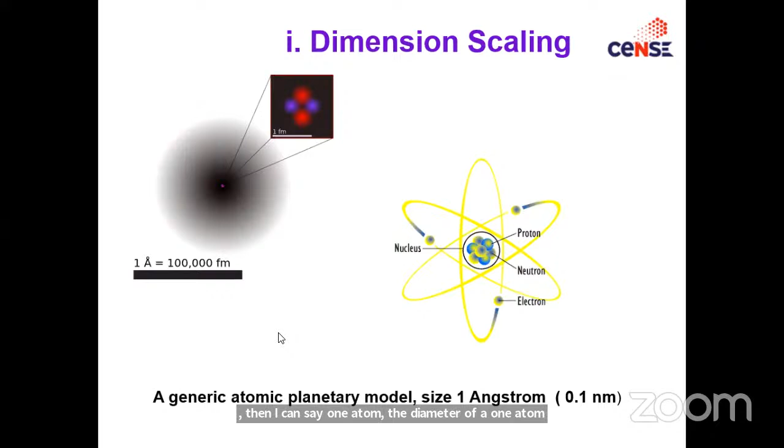Now, if you look at this one, graphene nanoribbon thickness is about 1 nanometer. The same sheet, if it is made into a tube, is called carbon nanotube. This is about 10 nanometer. This is multi-wall, about 100 nanometers.

Why I'm talking about nano: the word started with materials when graphene and carbon nanotubes formed, motivating scientists. Is it possible to make all these materials, particularly semiconductor materials, of this scale? Because if the material's dimension is reduced, their properties drastically change: physical, chemical, optical, mechanical, electronic properties all change. This leads to more invention to explore these for various applications.

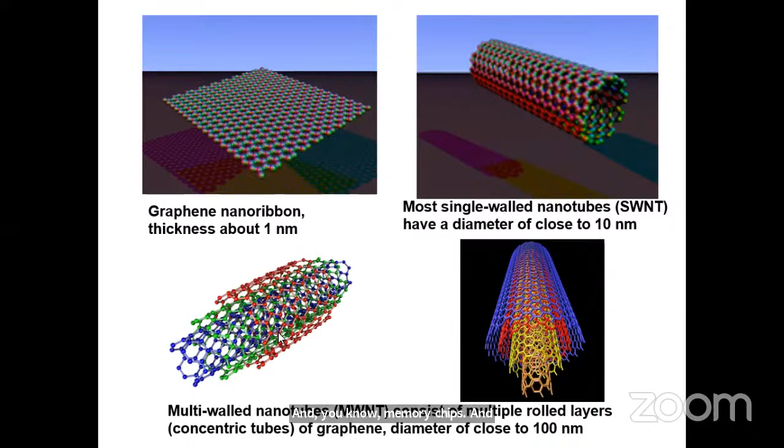The semiconductor technology in the 1980s started miniaturization and integration of many functionalization methodologies. In computers, you see memory chips, processors and various types of sensors, all came up because of this miniaturization. So that motivated us to look below that.

If you look at day-to-day life, we can see zinc oxide nanorods, another nanoscale material that started around 2000 and above. That's a different method I will show you later. This is about 1 micron. Then human red blood cells are of the size 8 to 10 microns.

Same thing, microelectromechanical systems - a device fabricated on silicon called tweezers. It's a mechanical tweezers used to hold individual biological cells. It is very difficult to handle them since cells normally fold, so if you want to hold the cells in a normal planar condition, you can use these tweezers. This is called a microelectromechanical system.

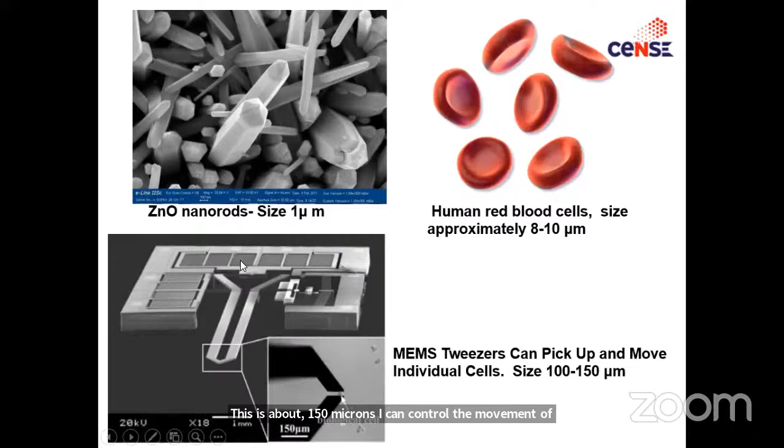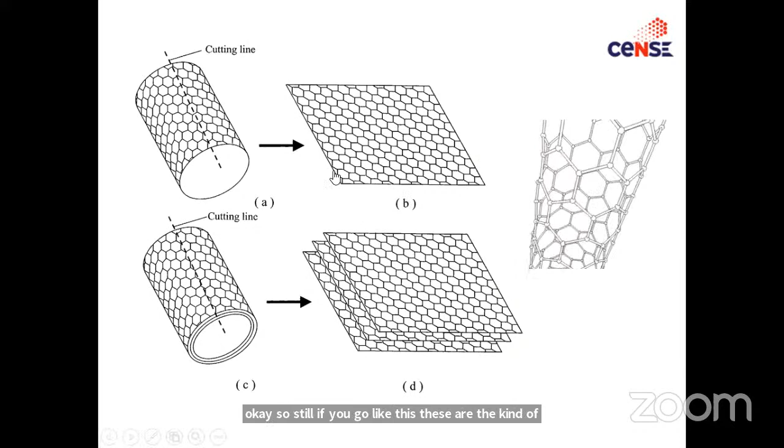This is about 150 microns. I can control the movement of this tweezer tip by applying voltage on the backside. So this is micron scale technology. Still, if you go like this, these are repeated shapes of this single wall carbon nanotube sheet, all 1 nanometer, 10 nanometer, 100 nanometers.

This is what I'm trying to stress here. So this is the first production of nanotechnology based product, that is carbon nanotubes. If you look at the right side, as I mentioned, if the material's dimension is reduced drastically, the physical, chemical, and various properties will change. So one glimpse of this is carbon nanotube.

Various techniques have been developed to produce nanotubes in sizable quantities, including arc discharge, laser ablation, high pressure. This has been a research challenge all these years. Now many of these techniques have matured so that you can make this nanostructure on a big scale. That was a bottleneck for some years, but in some applications these are now well established.

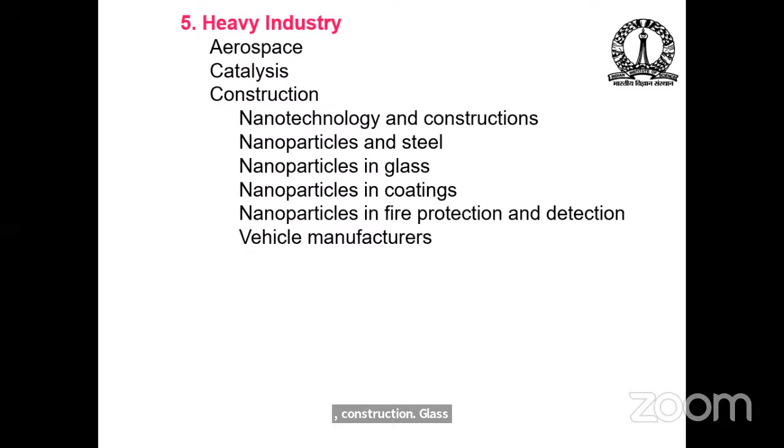So then heavy industry like aerospace, construction, glass coating - varieties of applications you can see. Vehicle manufacturers - I think you all know these days, all the cars and vehicles are equipped with MEMS, micro electromechanical based sensors. All cars are having this kind of sensors.

Now, next generation, you will have nanotechnology based sensors. These MEMS technologies were invented around 20 years back. Now they are all well established, and we are using all those things. So it may take some more time, like consumer goods - nano foods, household, optics, textile, cosmetics, agriculture, and sports. These are the possibilities, and many have already been deployed in applications.

And still, one thing we have to remember - the risk of using nanoparticles in construction, and also the risk of disposing the nanoparticles, nanomaterials - still a big challenge, because we have been experiencing computer user wastage issues. These are still a problem to dispose, where to throw it off. All countries are facing the same problem of disposing now in the laptop era, and all bulky computers, TVs - you don't know where to dump them. So this risk is always there.

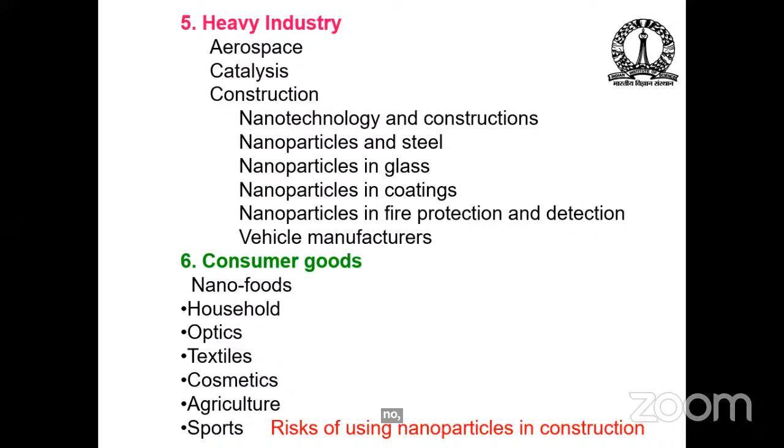Even for nanotechnology, it may be causing still hazardous health and environmental disasters. So that is a big question you have to keep in mind before doing any advanced technology.

At a time, there will be 25,000-30,000 athletes running, so it is very difficult to keep track of who started first when they are completing this around 42 kilometer run. Now, each participant is given a sensor that they have to tie to their shoelace.

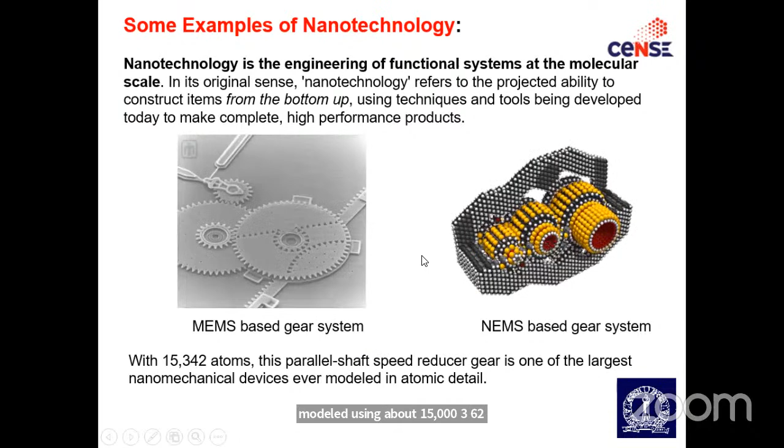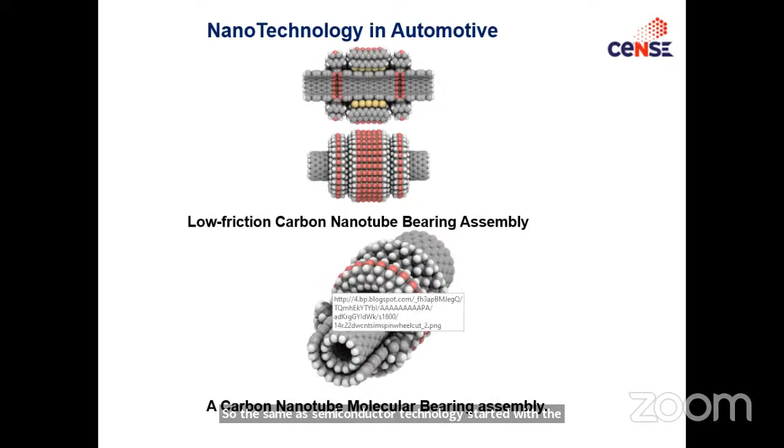Now the challenge here is how to make this nanostructure. That is very important, because see how silicon technology in 1970s, they started semiconductor fabs where you can make thousands of transistors simultaneously in one shot. So that's all called wafer fabrication process. Like that, how to make these nanostructures.

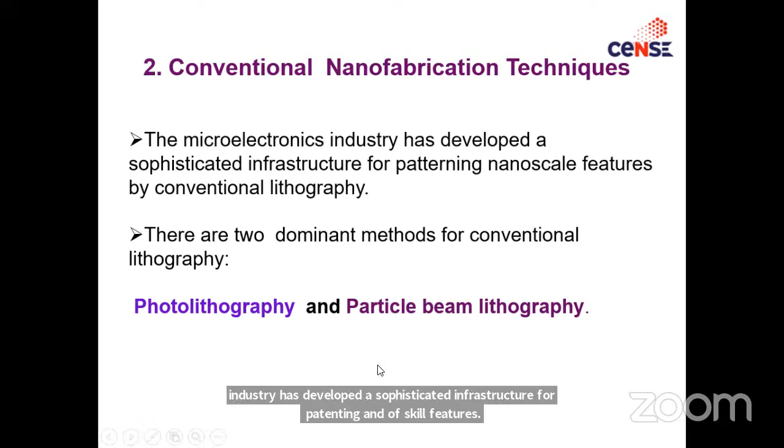The microelectronics industry has developed a sophisticated infrastructure for patterning nanoscale features by conventional lithography. There are two dominant methods, photolithography - photolithography is nothing but pattern transfer. If you look at this, I've collected from somewhere: litho is Greek meaning stone, graphia means writing - that means you will be writing some information on a stone. So in semiconductor lithography, silicon is your stone, and patterns are written with a light-sensitive polymer, that is the writing. So this is how it is done.

So lithographic patterns are repeated up to 40 times - this is the way the technology is developed. I'm not going into full details, this is a separate talk altogether if you go just into lithography. Historically, advances in lithography have gated advances in IC cost and performance. This is very important.

The advance, historically, lithography has the very great advantage. That's how ICs are made. The cost, unless it is done using this technique, making an individual transistor assembly is very expensive, and it needs a very high-end clean room. These are all expensive, that's why industries in India find it very difficult to maintain such fabs, fabrication labs, as well as the higher-end equipment. Okay, so whatever it is, this is how it is done.

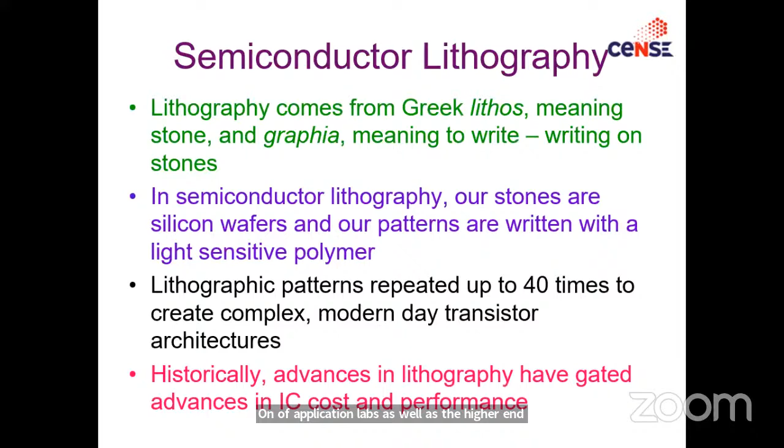I don't know how many of you remember the cyclostyle machines. Lithography is like when we were at school level, any notice or multiple copies had to be made using stencil cuts. They take a paper, the letters are cut, the alphabets are cut on the paper, then the paper is put onto a printer, then the printer puts the ink on it, making multiple copies. So lithography is also the same, it's almost like printing artwork on paper or another suitable material.

Nanolithography is the next level, the branch of nanotechnology concerned with the study and application of fabricating nanometer scale structures and patterns, with at least one lateral dimension. Dimension reduction can be in all three axes: x-axis, y-axis, z-axis, but I'm talking about the lateral, so only two axes, not all three.

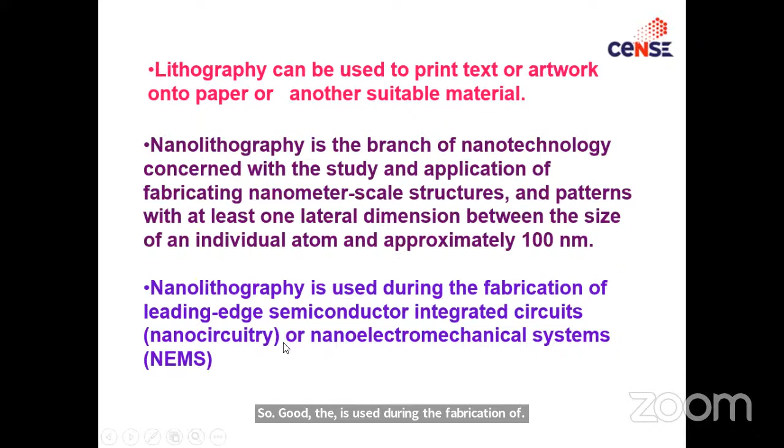Nanolithography is used during the fabrication of leading semiconductor integrated circuits, nanocircuitry, or nano electromechanical systems. There are varieties of lithography techniques, contact, imprinting, and different industries use different techniques, but I am not going into the details here. Let us start with this point.

Here you see this is a silicon substrate, a wafer, and you put a photoresist on it, and here is a mask. Whatever pattern you want to make, you make on the mask. In this mask, the black region is opaque, meaning light cannot pass through, and this is the pattern where light can pass through.

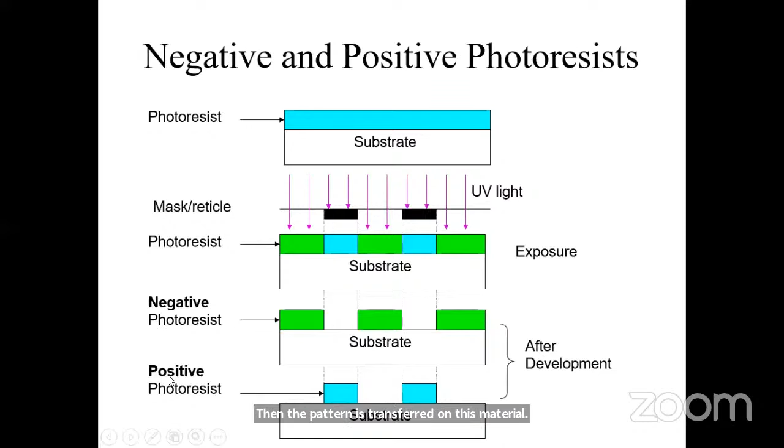This is a light-sensitive material, and you put a UV light, then the pattern is transferred onto this material. Then this photoresist can be removed using chemicals. There are positive and negative photoresists, and you can make patterns using photo masks, like the bright field and dark field mask, and transfer the pattern this way. So this is how it's done.

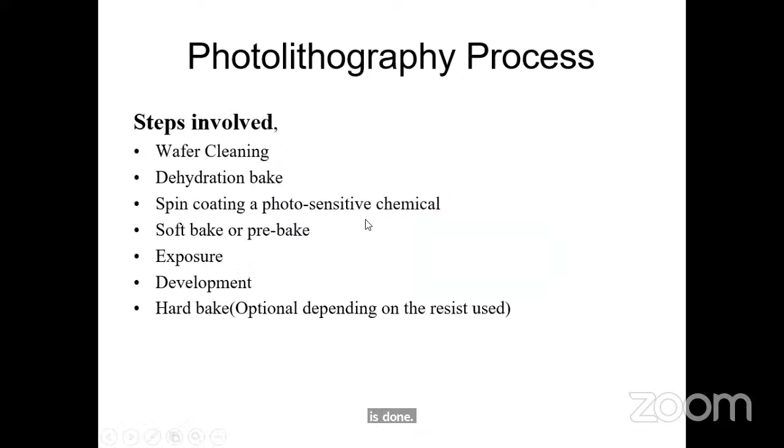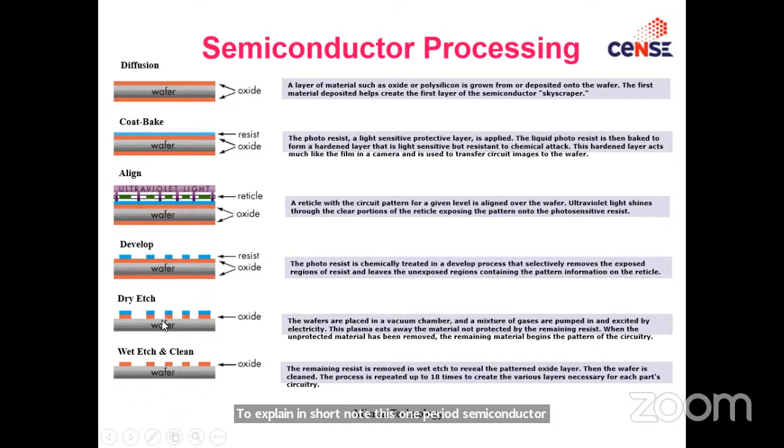Then there are various processes to develop all these things, it may be too difficult to explain in a short note in this one period. Semiconductor processing involves the wafer, baking it, aligning the mask, developing, etching, cleaning, all these things.

Now if you look at this, this is how an individual transistor is made. I think at least in masters you've seen P-type semiconductors, N-type semiconductors, transistors. This is NMOS, and this is PMOS. So this is how the microstructure is made, not full nanostructure.

Nano is up to 100 nanometers. People are doing this even at 500 nanometers, that is 0.5 microns, since 1 micron is 1000 nanometers. So this is how the pattern can be transferred, and ultimately this becomes the IC chip, which you can see at the bottom.

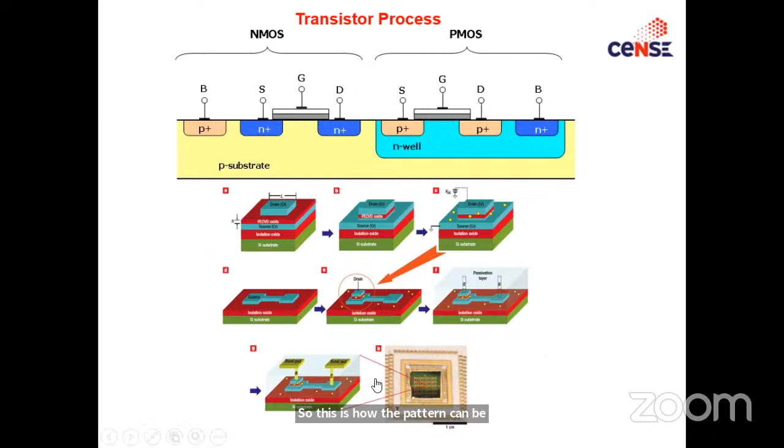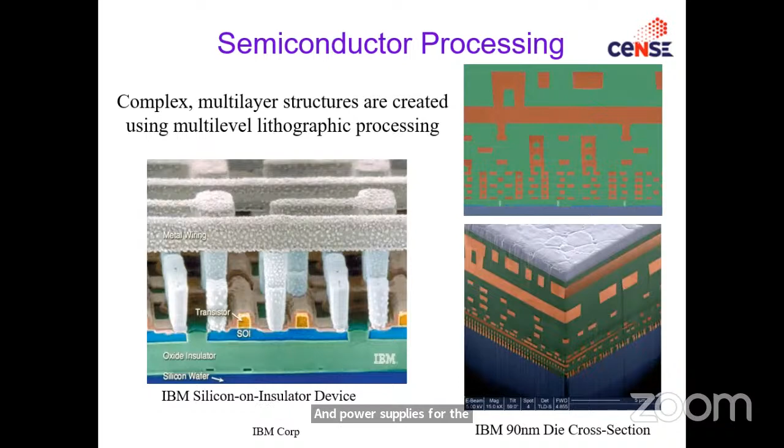If you look at this, this is an IBM structure, or semiconductor processing, where complex multi-layer structures are created using multi-level lithographic processing. You can see the cross-sectional view of the whole microelectronic process done on silicon. In silicon, a semiconductor, a metal for contact, a resistor, and a capacitor are all made. Putting all these together, you can make varieties of electronic devices like amplifiers, power supplies, power transistors, all built on this. So this is how ultimately it is done.

Why I'm talking about all these things is, in India we don't have this, though I don't like to tell you openly. Though I did a PhD in semiconductor physics in the 1990s, I never saw actual silicon. That's the state of our country at that time. I had never seen silicon, but I saw it for the first time when I went to Singapore in 1993. At that time, industries were only making 6-inch wafer based ICs. So as you can see individually, I have some.

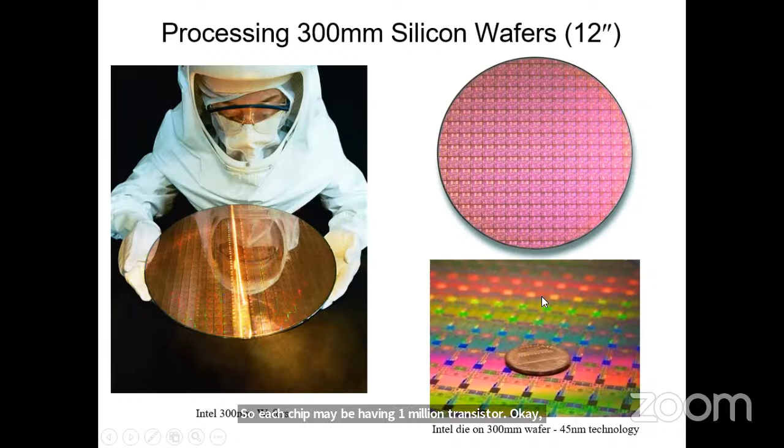See, this square is one chip. Later they cut it, it's called dicing. So this is the individual chip. Then they package it, and that becomes an IC. So this is how microtechnology works.

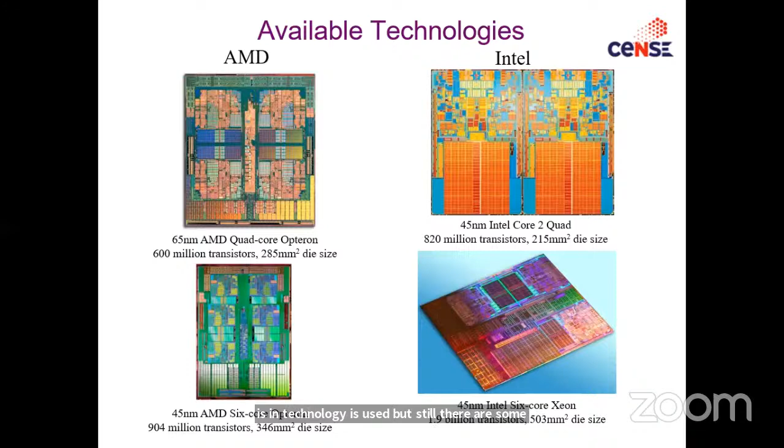In terms of scaling in nanoscale, the same technology is used, but still there are some limitations below 500 nanometers or 100 nanometers. Then another technique, another technology, is developed.

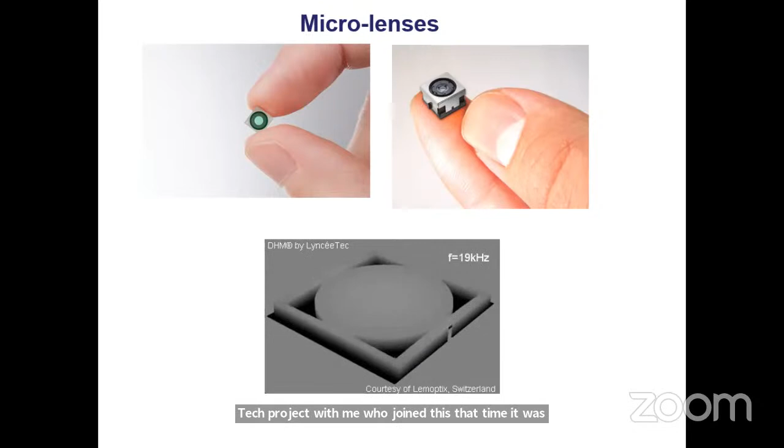Similarly, how many of you have seen your mobile cameras? This is a micro lens. All your mobile phones have cameras, and if you look at the backside, there's a small hole with a micro lens sitting there, where this micro lens is made. This is a well-matured technology. I think I have some lenses, because my master's student who did his MTech project with me joined when this just started, around 2002, when mobile phones started getting cameras, almost 20 years back.

Now our old film cameras have completely disappeared. We all live with these mobile phone cameras. We cannot spend even half an hour, one hour without a mobile camera and a photo. Every hour we take at least one photo.

So these are the micro lenses, and when I talk about the lens, the focal length is always changing. This is a variable focal length lens. You can see the focal length continuously changing, and this is a well established technology today. The dimension of these cameras is even less than a millimeter. Can you imagine? Less than a millimeter.

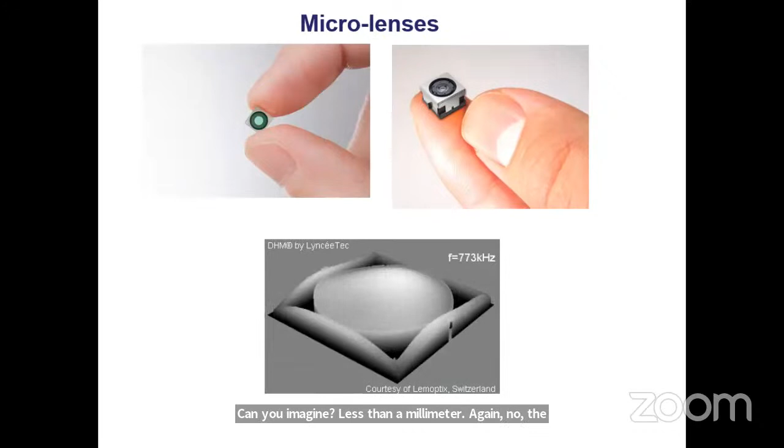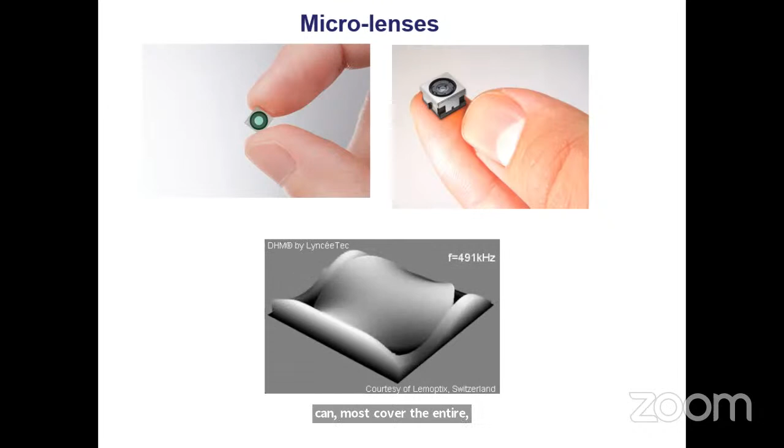The higher end mobile phones have cameras even 0.5 or 0.1 millimeter in diameter, maybe with a wide angle. You can almost cover the entire 270 degrees of angle. That is the level of micro nanotechnology.

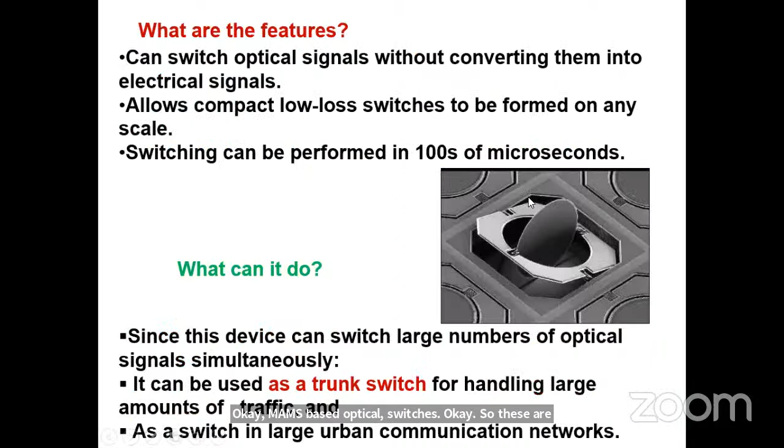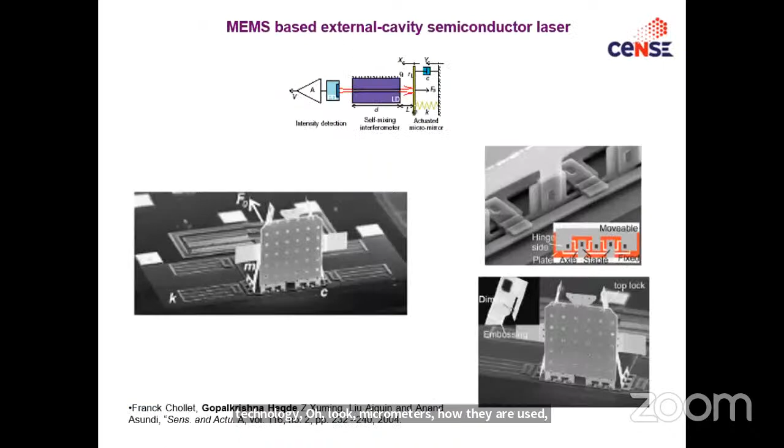So this is how all of this can be done through micro nanotechnology. These are all fabricated. MEMS based optical switches, using micro mirrors. This is semiconductor based technology, micro nano mirrors, how they are used as sensors, varieties of structures and methods.

Now, the limitation with this microtechnology is the lithography. Lithography is done using UV light. When the light passes through a small hole, there will be diffraction. So if I want to make 1 micron or 500 nanometer or 100 nanometer features, I cannot use UV-based lithography technique. I have to go for some other technology, that is deep UV, looking at the electromagnetic spectrum.

You cannot go with optical lithography. You have to go with electron beam lithography. That is the one used to make nanostructures, nano devices, through lithography.

So there is a limitation up to maybe 500 nanometers. You cannot go with the conventional lithography. You have to go for another technique called electron beam lithography to make the nanostructures.

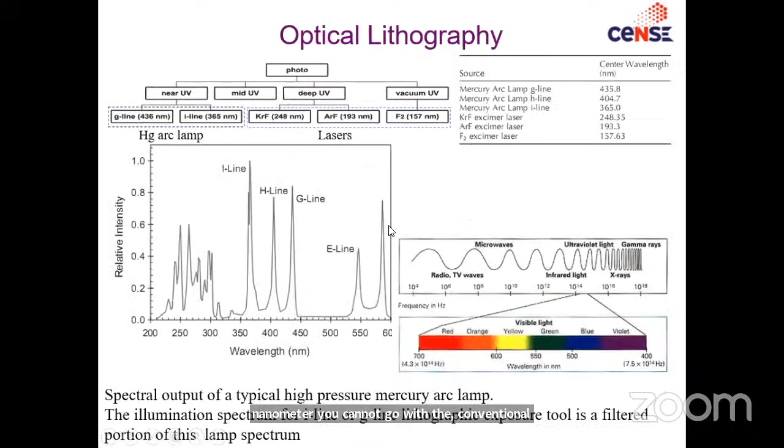Okay, let us skip all this. Now why I'm telling you, some Kannada is also there for those who can enjoy it. I used to give these talks in Kannada as well.

So I just mentioned when light passes through, it gets diffracted. If I do lithography using this, going down to 500 nanometers, my light gets diffracted because of the basic physics, so I cannot get the targeted pattern. This maybe works at 1 micron, but at 500 nanometers, if it gets diffracted like this, the pattern cannot be transferred with the same dimension.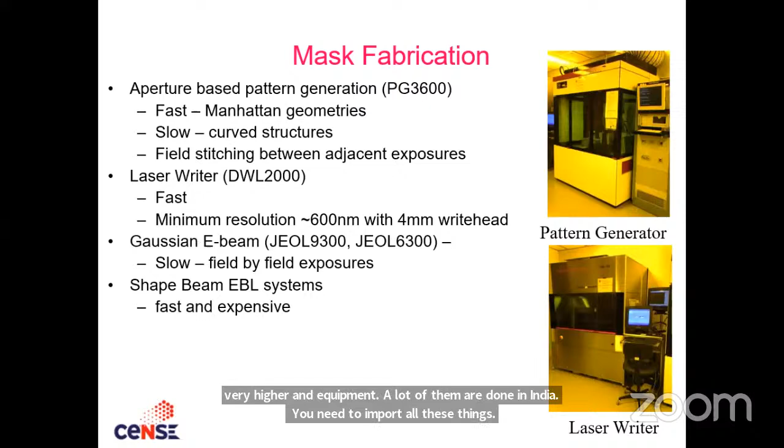So nothing to worry about. These are all the mask fabrication and other technologies. I'm just talking mainly about the technologies. They're very high-end equipment, and none of them are made in India. You need to import all these things. That's why we are not able to make much progress in semiconductor-based or nanotechnology, which is based on the conventional microtechnology industries. That's where the limitation lies.

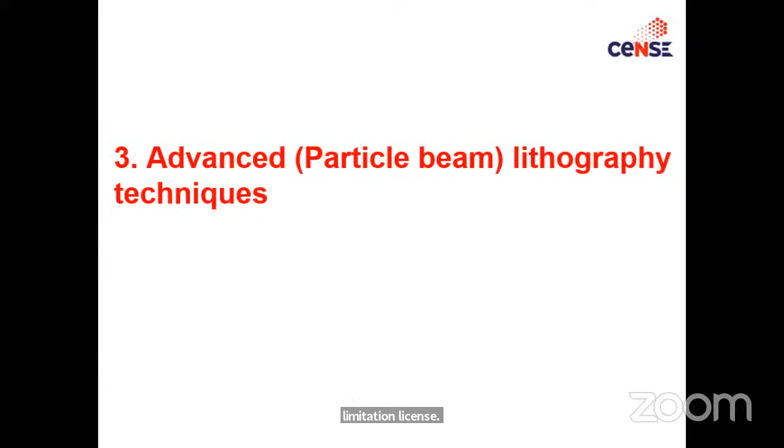Now this is X-ray lithography, but people are not using it anymore due to its limitations. Another approach is particle beam lithography, meaning instead of light, you use particles, that is, electrons.

Now cathode ray tube based TVs are no more. The electrons in cathode ray tubes used to move the electron beam inside the tube to produce the image on the screen. That was the earlier TV technology. Now this is no more; we are working on LED-based light emitting diodes, another interesting photonics technology. Now OLED-based screens are there, flat TVs have come.

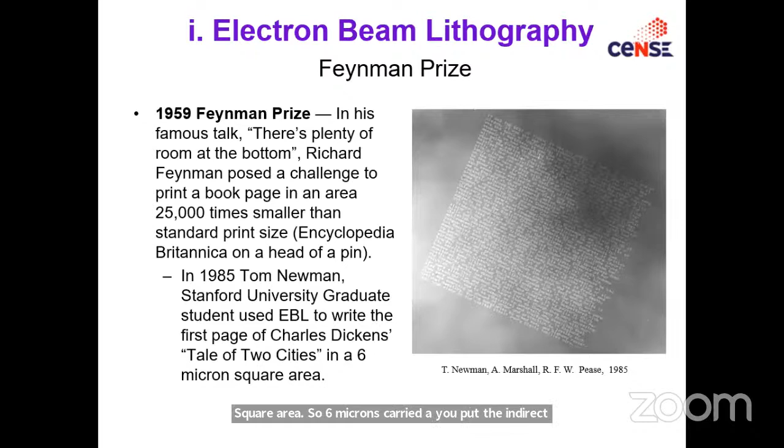Before that, this is where Feynman, one of the top theoretical physicists, mentioned in 1959 that there's still a chance. He put a challenge to print a book page in an area 25,000 times smaller than the standard print size. So one of his students wrote Charles Dickens' Tale of Two Cities in a 6 micron square area. That means there's a lot of chance, plenty of room at the bottom. That's his indication that you can go below the micron structure.

So that's where the next stage of nanotechnology started: electron beam lithography. Here, instead of using light, people started using electron beams because of the small dimension of the electron—I talked about 0.1 angstrom, 0.01 nanometer, similar to atom size. In electron beam lithography, you generate the electron beam and start writing structures. Unlike optical lithography, E-beam lithography allows high speed with small complex patterns. Point by point exposure limits the throughput; parallel exposure allows entire field exposure at once.

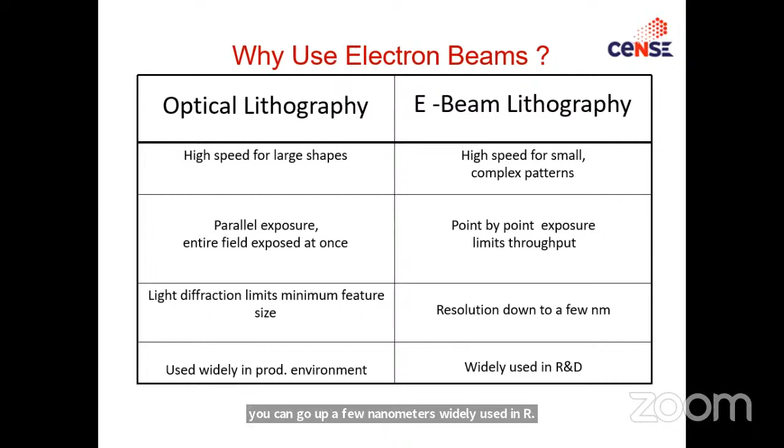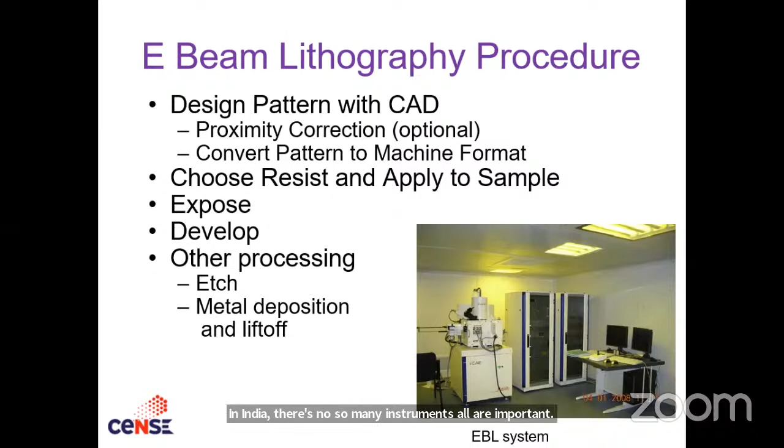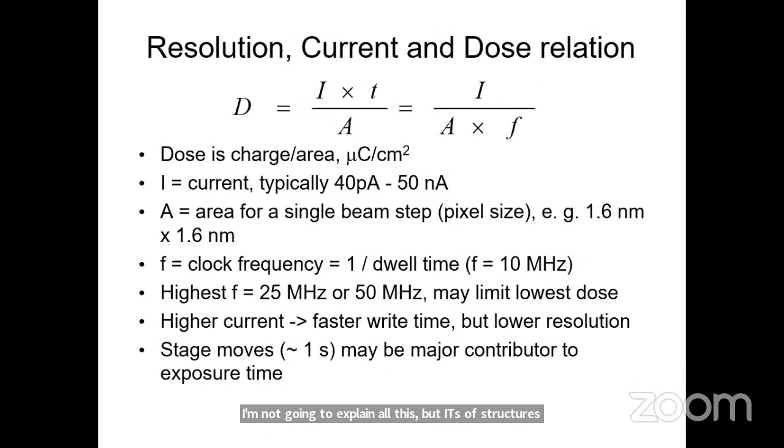Anyhow, this is a very complicated methodology; I'm not going to explain all this. Varieties of structures can be written using this one. This is how it works. There are many limitations and many control systems you have to use, and these are the mathematical limitations.

Imagine a semiconductor optical lithography process that you can do in maybe 1 or 2 hours. The same thing for an individual device will take 8 to 10 hours using this electron beam lithography. So it is not good.

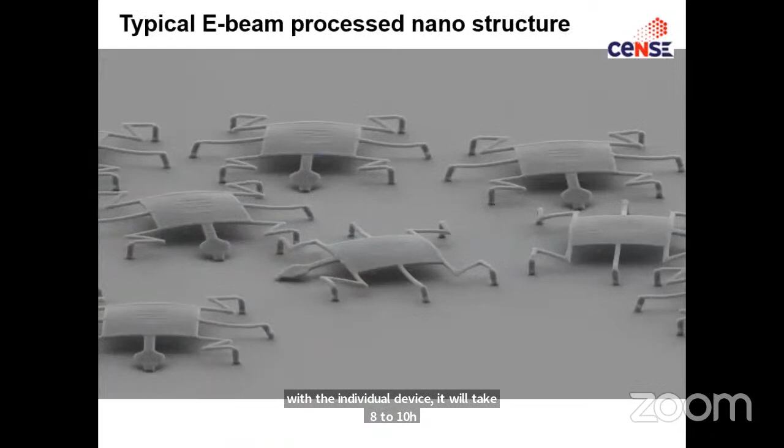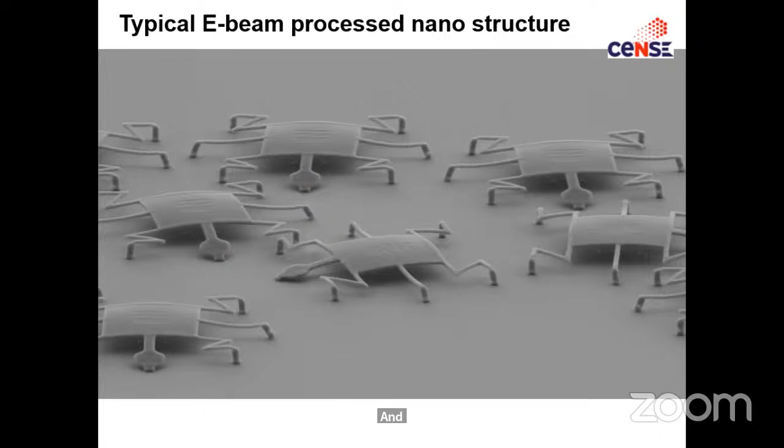However, structures like this—one of my friends from the US, very good in beam lithography, made this critical, interesting structure on silicon. I don't know how he did it. He didn't explain, but he used to say that he can move these creatures on a silicon wafer, and you need to see this under an electron microscope. I didn't see that, but he proved it.

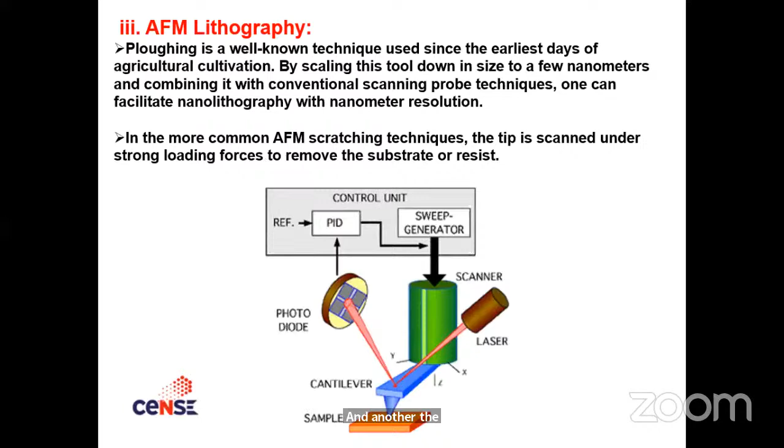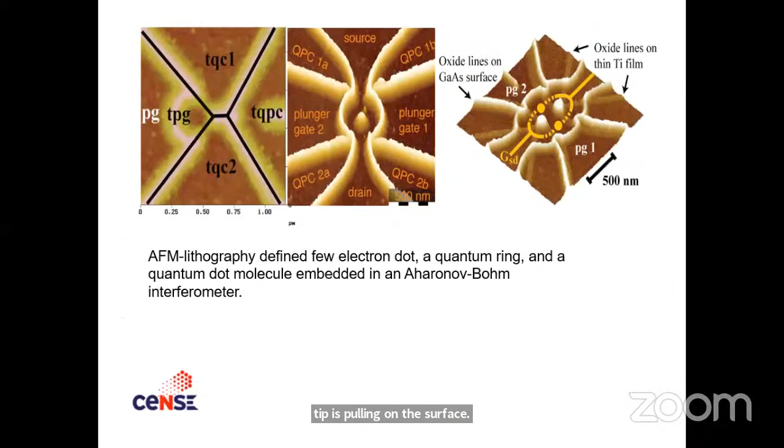Now, another focused ion beam, varieties of techniques are available. They are all very expensive and very difficult to make. And the atomic force microscope technology can also be used to write these structures. It is very similar to this ploughing method, where the tip is pulling on the surface. These kinds of structures can be patterned this way.

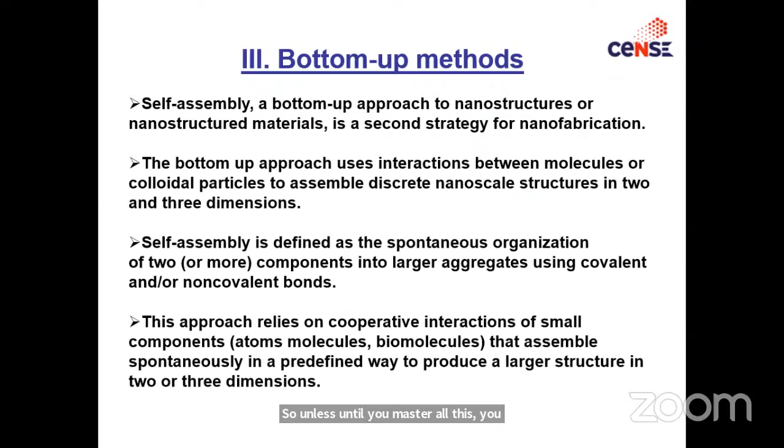So these are all very higher-end pattern transfer technologies for making nanostructures and nano devices. Unless you master all this, you cannot do technology development or deploy it in real applications. So there are varieties of other methods. This is the advantage with nanotechnology.

Sol-gel is a simple chemical method. PECVD, LPCVD, PLD, hydrothermal method, various chemical reaction methods - these are all available to make nanostructures. Chemists have found different techniques for this.

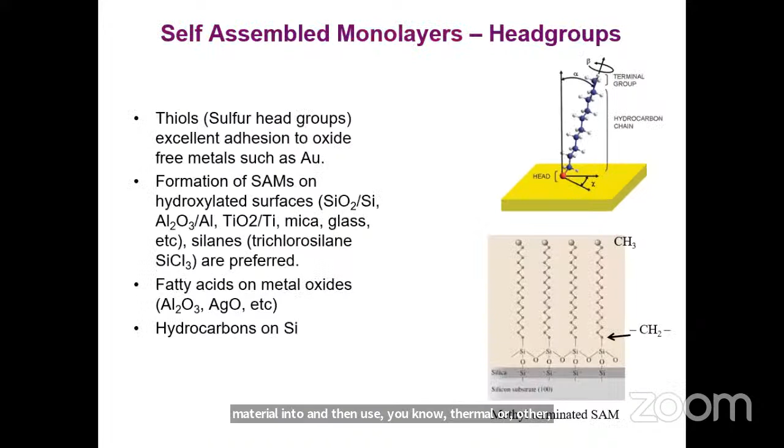Self-assembly refers to the spontaneous formation of discrete nanometer size units from simplest subunits of building blocks. These are chemistry processes, like crystal growing. You put a base seed material into it, then use thermal or other annealing techniques so that the structure grows on it. So these are all possible, and this is one of our techniques.

Now, one of the applications we were using is in solar energy - how solar energy is converted into electrical energy, the photovoltaics. This is where we also used to work. We thought of introducing nanotechnology in photovoltaics to increase the efficiency of the solar cell.

Mosquitoes can identify you even in the dark, where you are sleeping and which portion of your body is exposed. They come there only and bite, because there are various explanations - they detect some kind of infrared emission from your body directly, then come to that side. Infrared is a radiation, so these micro lenses use a single photon kind of light, trapped inside. That may be one of the reasons.

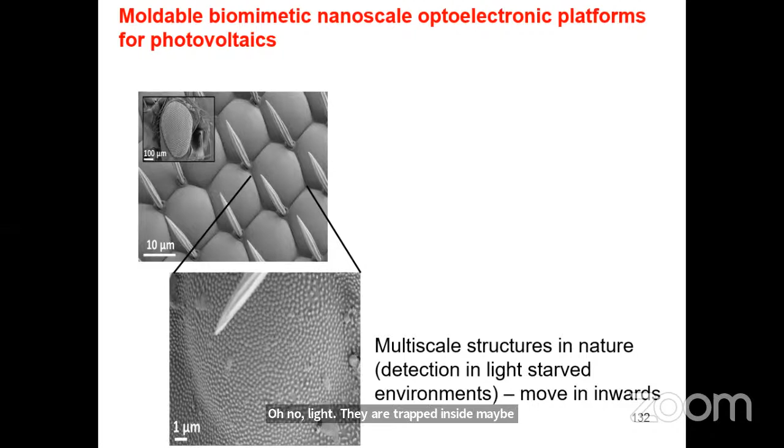Is it possible to make some structures and introduce that in a solar cell? In a solar cell, whatever light comes from the sun needs to be fully utilized for energy conversion, or electrical energy conversion. But that is not happening. Today's solar cell conversion efficiencies - silicon is maximum around 14 or 15%, not more than that.

There are so many solar cells - perovskite and others - people are proposing, but they haven't come up to the technology development level. They are still under development, but silicon is well established, though its efficiency is less. So, is it possible to trap all the light which comes to the solar cell? That's what our idea was.

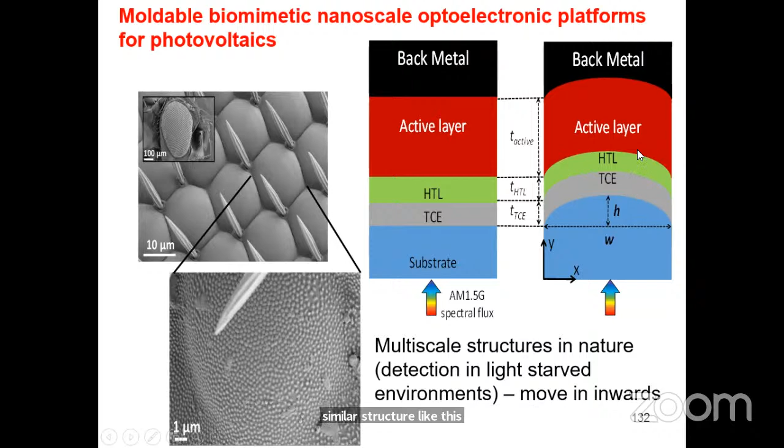So this is the theory we modeled - instead of using a normal solar cell structure, we made a similar structure like this fly's eye, curved it, and made these things. Initially we modeled it using mathematics, then we saw an increase in efficiency from 25% to 45% when we introduced this nanostructure in the solar cell, which we fabricated using a different method.

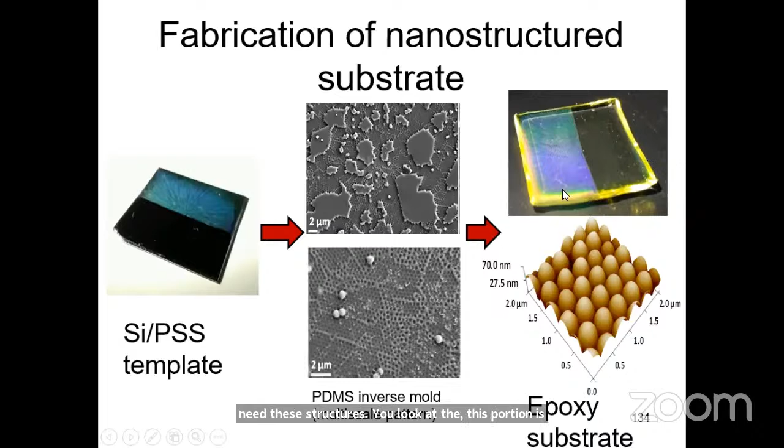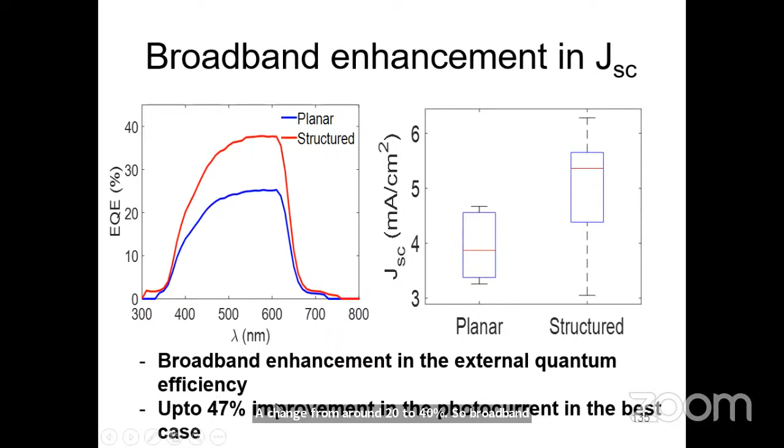When we made these structures, look at this portion - without the nanostructure versus with the nanostructure, this red one is the structure, that is the planar. If you look at the quantum efficiency, it changed from around 20 to 40% - broadband enhancement in the external quantum efficiency up to 47% improvement in the photocurrent in the best case.

These are different numbers I'm giving. Similarly, you can make different types of nanostructures - like this one by chemical method. This is entirely different; it is called the hydrothermal method.

You just keep some chemicals and a hot plate and leave it for some time with the process. We have done some mathematical modeling for this one. This is a hydrothermal method. By controlling various parameters, you can generate different types of structures.

So growth parameters: distilled water plus H2O2, and various other chemicals. I'm not going into the details, it's an entirely separate material. Now, one more thing is we came out with a simple

growth technique. Look at the hot plate, and this is a substrate. You are keeping CZTS hot plate techniques for CZTS heterojunction solar cells. So this is very, very simple, and we are able to make nanostructures just by controlling the stoichiometry of the chemicals inside.

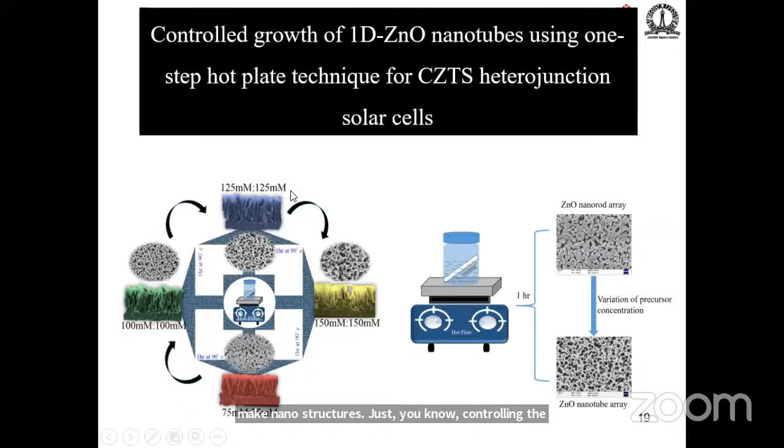We got various nanostructures, okay, so you can see here. Same type of chemical with process parameter control. These are the nanorods converting to nanotubes, and the tubes are getting opened as you further increase this. So this is ZnO nanostructure formation versus variation of precursor concentration. This is how a simple technique can be developed to use.

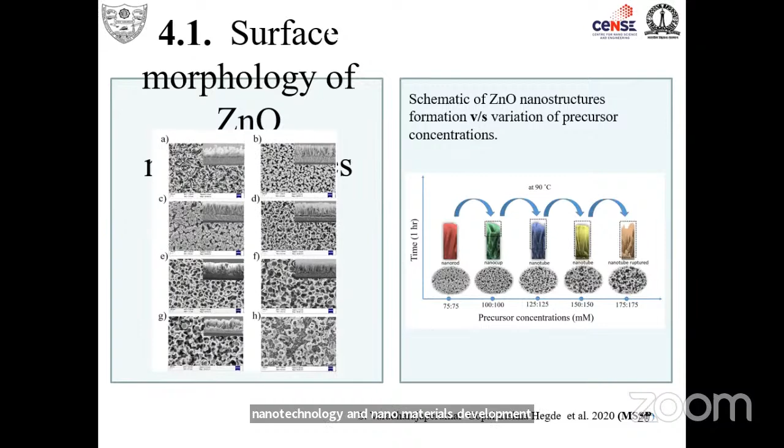That's why it is more multidisciplinary, and anybody with the motivation to develop and understand nanotechnology and nanomaterials development can work on this. So now, nanotechnology, see, these things,

I showed in the previous case somewhere, nanotechnology is a multidisciplinary science, like one of the art sections where you have multidisciplinary art. So one of the things I observed was the costumes they used for makeup. They're all nanotechnology based powders. I saw this somewhere, and it was there for a long time.